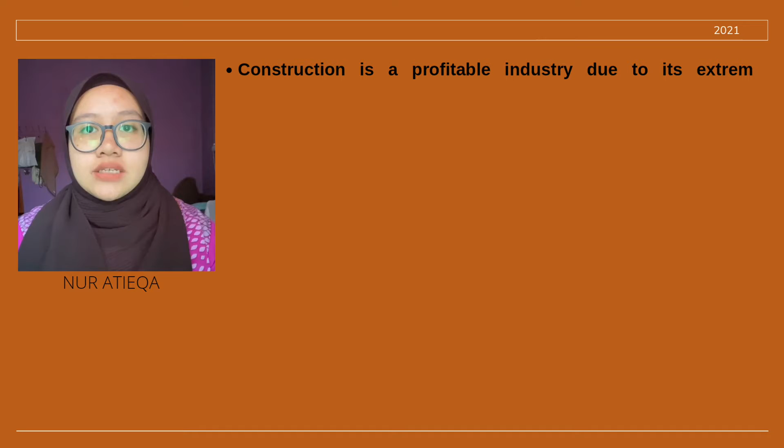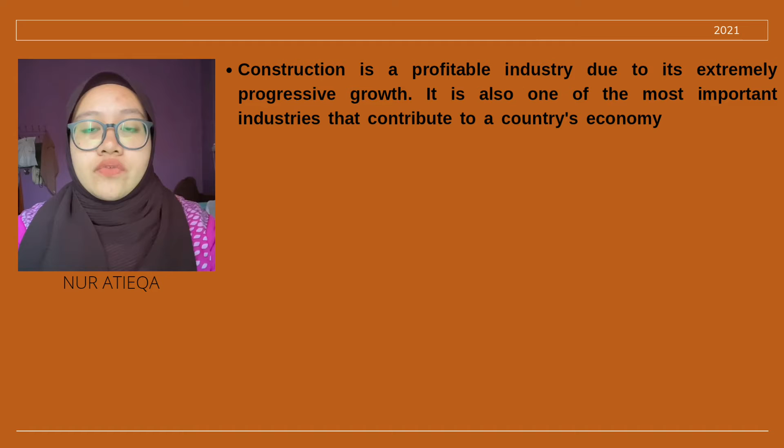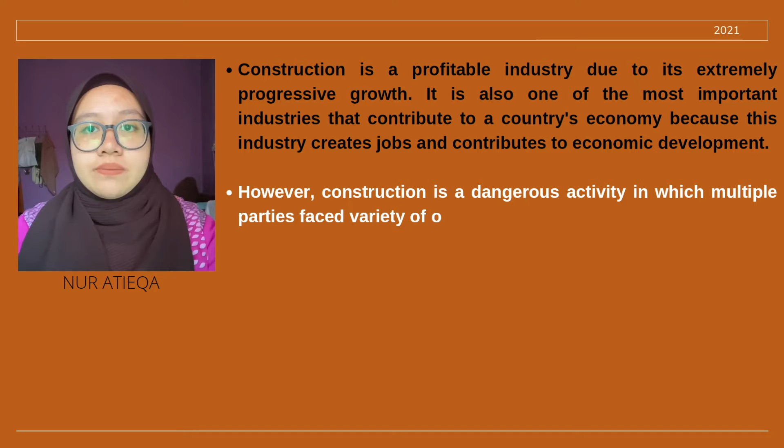Okay, so basically construction is a profitable industry due to its extremely progressive growth, and it is also one of the most important industries that contribute to a country's economy because this industry creates jobs and contributes to economic development. However, construction is a very dangerous activity in which multiple parties might face a variety of obstacles in a particular

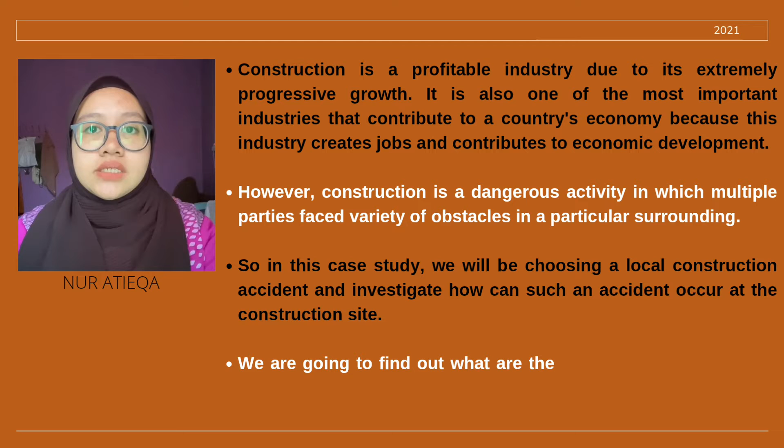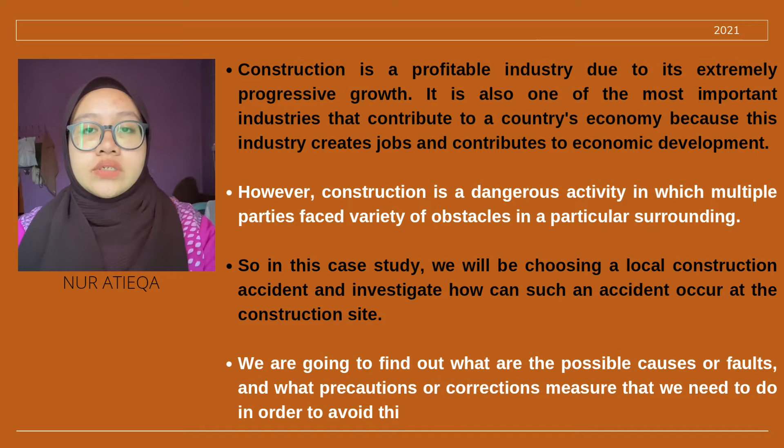surrounding. So in this case study, we will be choosing a local construction accident and investigate how such an accident can occur at the construction site. We will find out what are the possible causes or faults and what precautions or corrective measures we need to do in order to prevent this kind of accident in the future.

My name is Nurul Hafizah, and I will be talking about the case elaboration. This case follows the death of a worker back in 2020. On the 23rd of June, a factory worker was reported dead in Johor. The accident happened when the foreign worker got crushed by a precast concrete mold while he was cleaning the mold for it to be used for the following activity.

The factory was put under investigation and found several aspects that did not follow the OSH regulations and guidelines. This includes problems from the way that the factory was running and how they were managing their employees. All records and documents related to the accident have to be taken into consideration and collected to find factors that could cause the accident to take place. This helps to ensure that it does not repeat and the accident is properly taken care of.

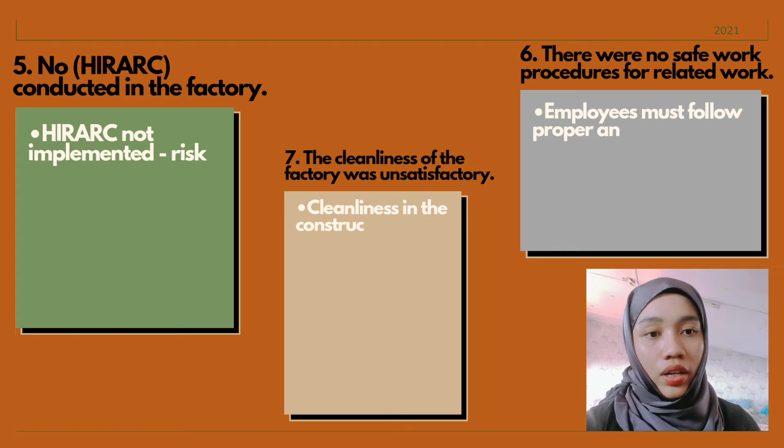Number 5, there was no risk assessment or HIRARC conducted in the factory. If this HIRARC is not implemented, then the risk of injury to the employee or anyone who is in the construction area will not be impossible. HIRARC helps to identify all the factors that may cause harm to employees and others. Number 6, there were no safe work procedures for related work. Employees must follow proper and safe work procedures to avoid injury or accident. I can give examples such as using a safety helmet while in the construction area.

And lastly, the cleanliness of the factory was unsatisfactory. The construction area is very important to take care of. This is because the construction area is a work area, and if it's not clean, it can interfere with the peace of employees to carry out their work or duties.

I'm Nur Eliysa binti Idris and I'll be explaining about precaution, safety, and correction measures.

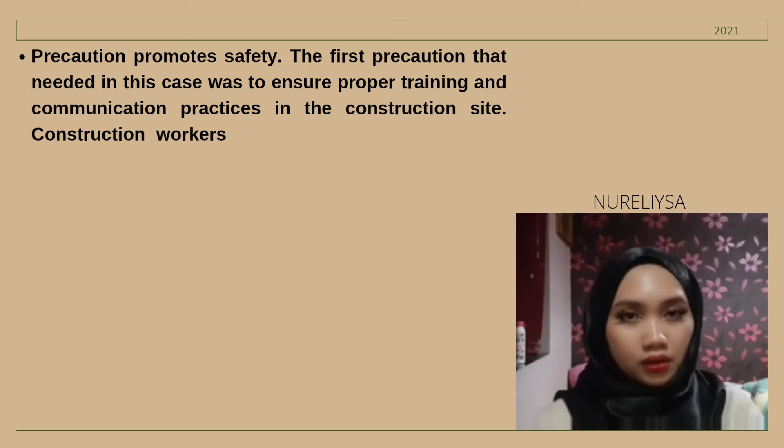Precaution promotes safety. The first precaution needed in this case was to ensure proper training and communication practices in the construction site. Construction workers operating in medium to high risk environments must have health and safety training so they can become ethical and careful of all the risks and actions they perform at the construction site. Having basic knowledge in first aid training also helps the workers to save their own or their colleagues' lives.

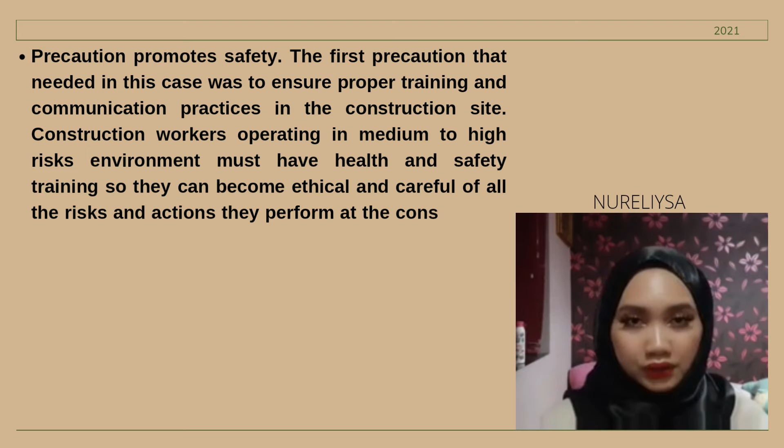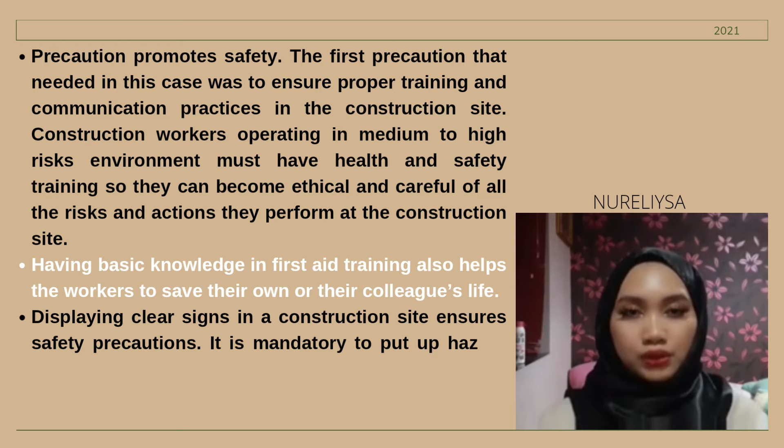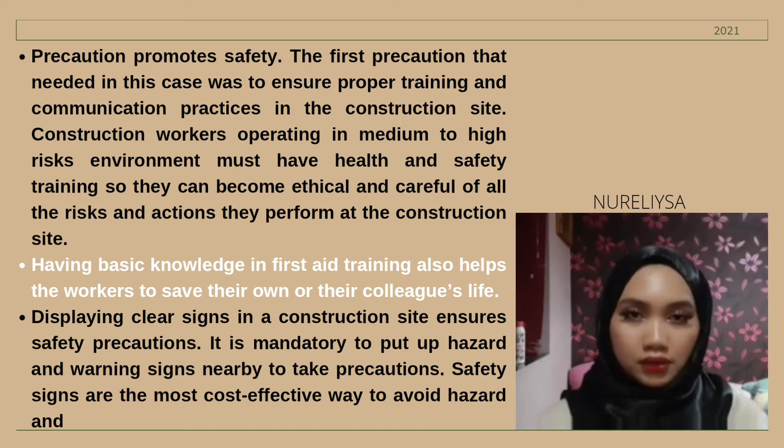Other than that, displaying clear signs in a construction site is to ensure safety precautions. Workers on sites are exposed to many potential dangers. Therefore, it is mandatory to put up hazard and warning signs nearby the construction site to take precautions. Safety signs are the most cost-effective way to avoid hazards and dangers such as falling objects.

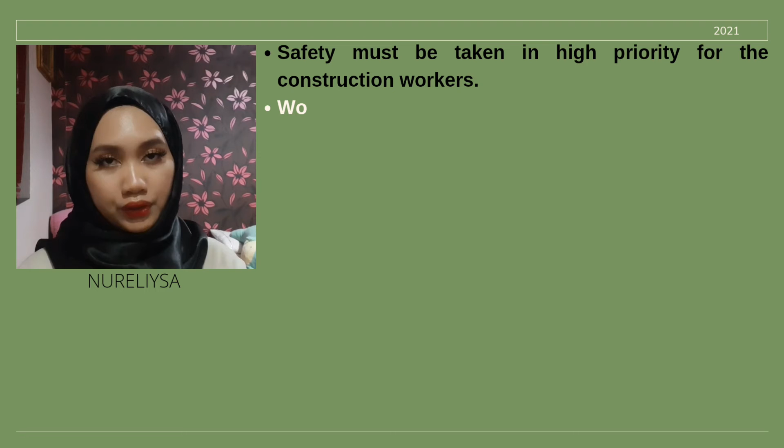To avoid the same mistake done as in the case, safety must be taken as high priority for the construction workers. To start off, workers need to wear the correct protective gear when on site to avoid heavy injury or fatality. Protective gear includes helmet, goggles, knee pads, ear protection, and high-vis jackets. Wearing the right protective gear will ensure workers experience only minor injuries compared to having no protective gear.

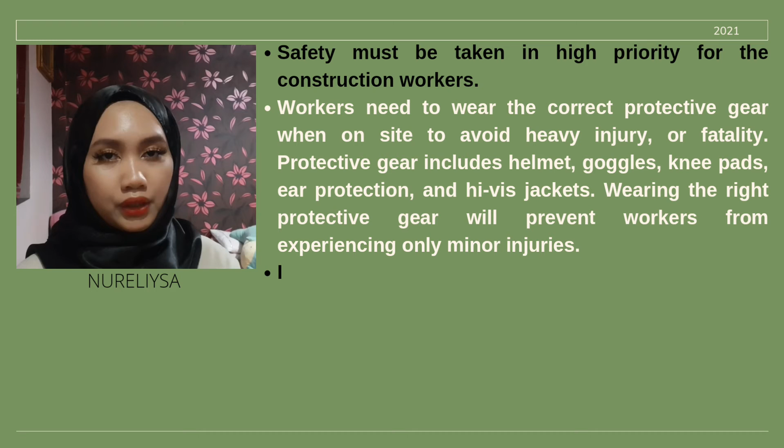In order to prevent objects from the site collapsing and falling, construction and maintenance of scaffolding must be taken into account in maintaining safety of workers. Scaffolding should be built on stable grounds with solid footing to avoid any nearby constructions from collapsing and harming any workers.

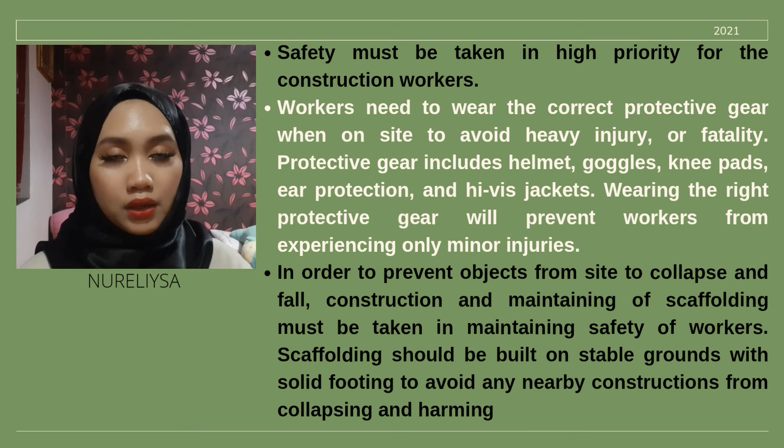I am Azia Asmira. So, for the correction measures, the first one, the factory must register with the Department of Occupational Safety and Health (DOSH) under the Ministry of Human Resources to ensure employees' health, safety, and welfare to protect them from work accidents. Second, the workplace must follow the Occupational Safety and Health (OSH) system to prevent any minor to heavy accidents. The OSH system helps to improve all employees' awareness of the safety and surroundings of the work environment.

Besides that, all 18 of the gantry cranes in the construction site must be registered with the DOSH for its legal requirements. Next, providing access for transportation needs to be done to allow easier access, driving, and walking for employees to do their work. Other than that, the factory must conduct a risk assessment (HIRARC) to help identify all causes and factors that may cause harm to all workers working on site.

Also, proper training and safe work procedures must be given to the construction workers to give them awareness to avoid an injury or accident on site. And lastly, the factory must be clean because its cleanliness is not satisfactory.

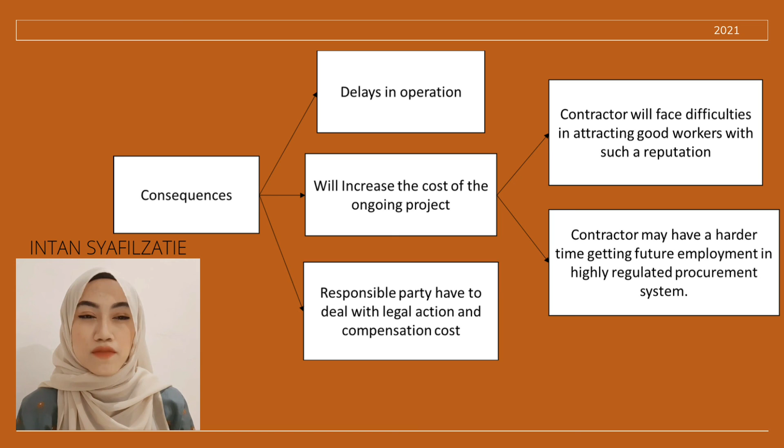So these are the things we need to pay attention to other than preventing accidents from happening. Safety and health play a big role in construction industries. It can either benefit you or bring disadvantages to your project based on how seriously you take this issue.